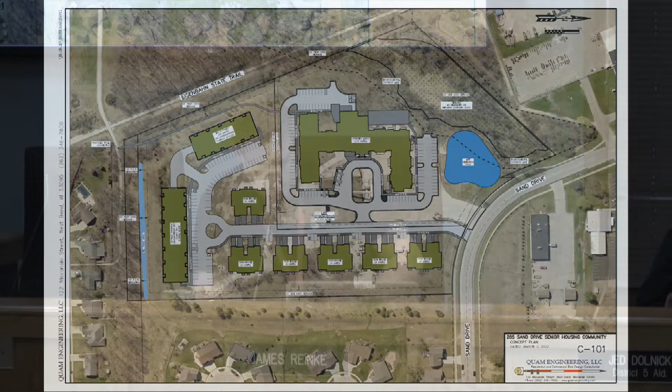Given the size and the limits of access for the site, it is recommended that trash corrals for the storage of refuse and recycling be required for the large multifamily buildings. City refuse pickup would not be available for those buildings given their size and the type of refuse service needed.

The developer is seeking endorsement of the revised concept to move forward with site plan configurations and approvals for both the institutional and the multifamily development.

Thanks so much, Jim. So as was stated, we're just looking for feedback at this time, so I'll open it up for the commission if anybody has any comments or questions.

Yes, sir. I assume there's space available for the additional 15 parking spots you said they're short on in the design? Yeah, they should be able to find an area for those, with a little bit of tweaking of the site.

How is the refuse handled if the city's not doing that? It would be through private collection, a private contract.

Yes, sir. I fielded a whole bunch of emails, and thanks to city staff, I think most of the questions were answered. Some of the questions were beyond my abilities, so I appreciate Mark and Jim's assistance.

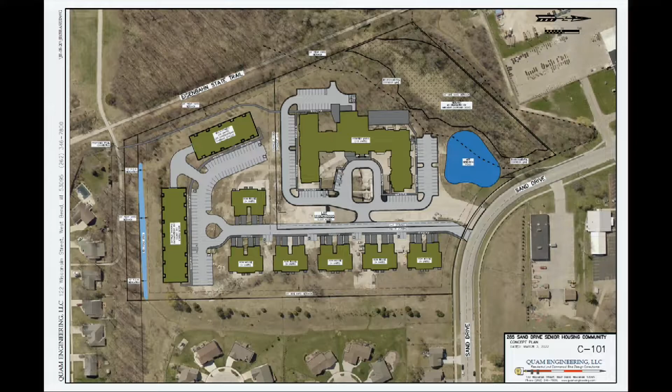But just to say, this being a concept plan, there are some slight remaining concerns about the sight lines off the two cul-de-sacs, Webster and Richards. That will have to be nailed down at site plan time. At this stage with the concept, there are some best guesses, but with the site plan that comes later, when there's more to know about the excavating and so on, there'll be a much better picture of what those sight lines are going to be.

And then the other issue that has kept coming up, understandably so, is about traffic, and that would be part of the developer's agreement, am I correct? Is it at that stage that we require it, or at site plan, or what?

So we would require it at site plan. I had been contacted by the developer's team, by one of the consultants, to do the traffic impact analysis. But I told them to wait, because they were going to do a traffic impact analysis on a concept plan that we had reviewed last year, which we knew was not the final plan. So they would have to do it then, and then they would have to do it again with the final plan with all the changes.

So I told them to wait until we do have an actual site plan, which is going to be more the final configuration of the site, and then there would be the traffic analysis based on that, because we had unit numbers moving up and down, and we need those numbers set before we can do the final study. So I didn't want them to do the study twice, so I asked them to wait until they have a site plan developed, and then there could be a study relating to that site plan. So it is at the site plan time that we would get that.

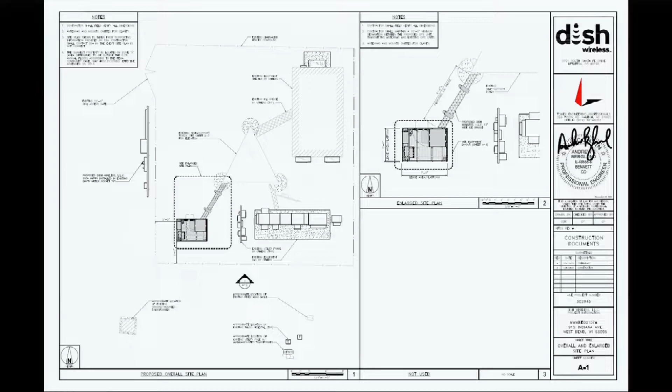Since this proposal is amending the original conditions of the conditional use permit, we recommend that some of the conditions listed be carried over from the original permit onto this one. All property owners within 200 feet were notified, and staff didn't receive any comments or concerns. So staff would recommend approval with the listed conditions.

Thank you, Jim. So this is a public hearing. I'll open that up. If anybody from the public would like to speak on this item, feel free to come on up.

Motion to close the public hearing. Second. All those in favor of ending the public hearing, say aye. Aye. Any opposed? Thank you.

We'll be looking for approval of the revised CU permit. Motion to approve. Second. Any comments or questions? Hearing none, all those in favor, say aye. Aye. Any opposed? Thank you.

Number 2, CU-22-003, public hearing for a conditional use permit to amend the existing conditional use permit CU-03-002 to allow for an additional communications user on the existing 150-foot cellular tower at 2230 South Main Street within the I-1 Institutional Public Service District by AELF Investments. The applicant is them, and the agent is Jeff Steinberg of Crown Castle.

AELF Investments has submitted a conditional use request, very similar to what we just approved. This is on a 150-foot tower at 2230 South Main Street. It's actually the same carrier requesting the conditional use amendment. Same type of equipment—they will be adding their antennas below the existing ones, so the height of the tower will not change. It's on a 5x7 pad, located within their 70 by 100 lease area.

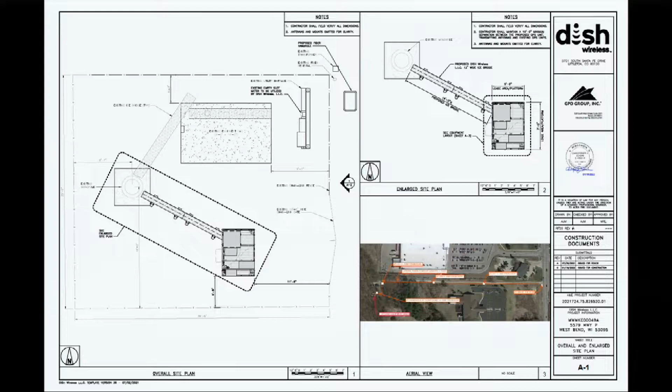We would carry over previous conditions of the other conditional use permit for this permit, and we've also notified everyone within 200 feet, and again we've had no comments or concerns.

Thank you, Jim. With that, I'll open up the public hearing. If anybody from the public would like to speak on this item, feel free to come on up. Oh yes, we do. I'm Jeff Steinberg, working with Crown Castle, so I'm just here if anyone has any questions. Sounds great, if you have any questions let me know.

Thanks for being here. I heard a motion from Commissioner Fleischman, second by Muddle. All in favor of ending the public hearing, say aye. Aye. Any opposed? Thank you.

We'll be looking for a motion to approve. Approval. Thank you, Model and Fleischman. All in favor, say aye. Aye. Any opposed? Thank you.

Moving on to site plans. Number 1, SP-22-003, site plan for exterior renovations for the east side of the building located at 105 through 111 North Main Street by Tracy Serwat of TRS 105 Main LLC. The applicant is him, and the agent is Solid State Architecture.

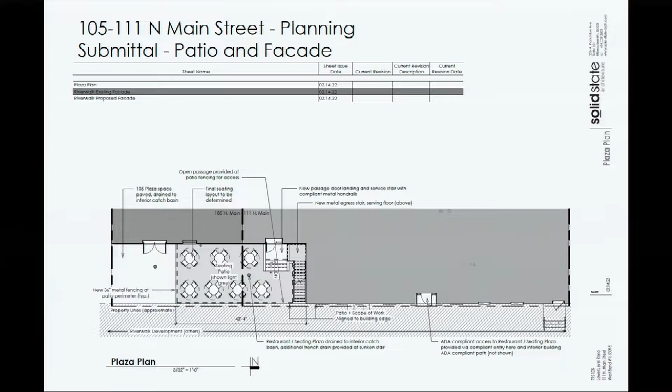TRS 105 Main Street has submitted exterior renovation plans and also a site plan for a patio addition, or reconstruction, to the east side of their building. The property is within the downtown area. The architectural changes include the existing brick being repaired and painted a cream city brick color.

Copper cladding will be used to accent the facade and infill areas. The windows and doors are planned to be changed out and upgraded. The patio itself is planned to be renovated and redone to complement the Riverwalk project.

As part of the changes, there are a couple of doors being changed that are within the floodplain elevation. Those doors would have to comply with our current flood standards, being either flood-proofed or certified as being flood-proofed.

There is a window on the far south end of the building that they were planning to enlarge. Unfortunately, due to the floodplain requirements, that window has to remain the same size, so as not to increase the flood area for the building. So there are some minor revisions that need to be done to that.

During review, staff had some questions regarding the grades and some drains being installed, so we need clarifications prior to issuing any permits—clarifications for the grade to maintain due to the flood elevations, and also for connections due to the Riverwalk being reconstructed.

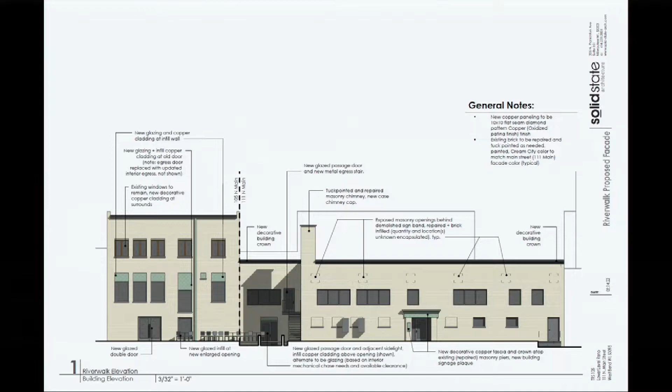So staff would recommend approval of the site plan with the listed conditions that we had for that. Thanks, Jim. I'll open up to the commission if anybody has any comments.

Yes, sir. I wanted to add that we will need some clarification for the stormwater. The new areas of the patio, we don't know what is there right now, so if they can show that on the plan. And then we need to know where those catch basins are going. So I would say that we would need to clarify the stormwater management conditions of the site prior to approving this.

Thank you. I will say, Max, that I did go through past photos of the site because I had the same questions. Right now it's not a good judgment of existing condition because of the utility relocations last year along the Riverwalk. But to judge accurately what we're changing it from, it's predominantly impervious - it was either hard packed gravel or concrete back there. So there's not going to be a lot of change relative to this, but we'll get that confirmation for you.

I did just want to say bravo to these folks for stepping up and doing this to the back facade of their building. I just think that's fantastic. One of my concerns when we got onto the west side of the river was that we were going to have a bunch of back buildings that weren't necessarily going to do anything about it.

Yes, thank you. So this is the redevelopment for the former Shopko site. The proposal is to subdivide that building into 3 units, and then also build an addition to the south for a 4th additional unit. So the tenant units range from 35,000 square feet to 8,900 square feet.

The property is zoned B1 Community District, Business District, and the retail alterations are being done in accordance with the zoning district. Access to the site will remain the same.

What they're proposing to do is to seal coat the parking lot and restripe it. They're also adding a loading dock on the west side of the building to accommodate loading and unloading for one of the tenant units. And again, the 8,900 square foot building addition will occur on the south end of the development, and that area will just be slightly modified to accommodate the grades, the sidewalk, and the building portion for that. The site lighting will be upgraded

from what exists today. The landscaping areas will be cleaned up, and any dead and damaged plantings will be replaced within those areas. The screen refuse area does exist on the south side of the building. Stormwater management is needed - an amendment is needed for the development and is currently under review by the engineering department. And again, the grades will be slightly modified just to accommodate the new building addition area.

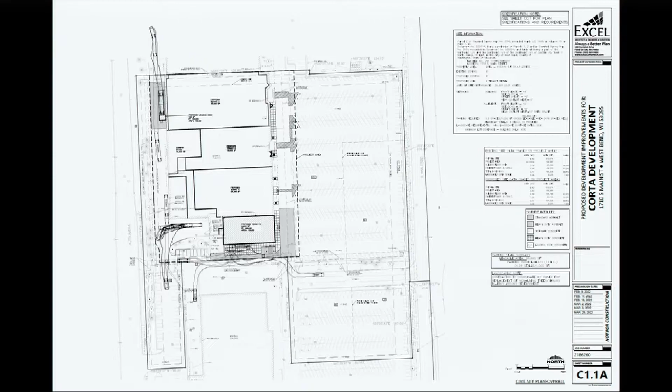The architectural building elevations have been included. The building itself will be repainted, and each of the tenant areas will have their entrances modified for their uses and to dress up the face of the building. The wall signage is depicted on the building. Individual permits will be required for those in compliance with the codes. Depending on the size, these will be determined based on how they appear and how they fit in, to be appropriately sized for each tenant unit.

Staff would recommend approval of the site plan with the listed conditions. I'll open up to the commission if anybody has any comments or questions.

Yes, Max, I do have a couple of questions. About that loading area, the bollards are around the curb—do they need to go all the way to that man door at the end of the sidewalk? That was a loading area for that tenant unit. After our review, they were originally showing a perpendicular unloading, but unfortunately, due to the distances we have there, we won't be able to do perpendicular. They'll have to do a parallel unloading area to meet our code.

I know this company's doing all of this, but are they getting separate site plans for the facades? No, it's a unified facade. What you're seeing is what's going to be constructed. They're just modifying these to meet their needs, but it will be done by them. I see, okay, good, thank you.

Motion to approve. Second, thank you, Model and Schmidt. If there's no further comments or questions, then all those in favor of approving the site plan with conditions, signify by saying aye. Aye. Any opposed?

Thank you, and then we're going to move on to zoning amendments, certified survey map, and site plan. Items 1, 2, and 3 are all about the same topic, so I'm going to read all these off, and then we'll let Jim take it from there.

The first one is number 1, ZPU-22-003, a public hearing for a zoning amendment for commercial redevelopment at 815 West Paradise Drive to add a PUD, planned unit development overlay district, over the existing B1 community business district to allow for the approval of a site plan for design flexibility and for shared site amenities by PMM Development LLC. The applicant is Ram Subedi of PMM. The agent is Adam Stein of Logic Design Architecture.

And number 2, CSM-22-004, a certified survey map to create 2 lots located at the southeast corner of Parkway Drive and West Paradise Drive by Ram Subedi of PMM Development. The applicant is him, and the agent is Don Chaput of Chaput Land Surveys. And finally, number 3, SP-22-005, a site plan for commercial redevelopment at 815 West Paradise Drive by PMM Development LLC. The applicant is Ram Subedi of PMM. The agent is Adam Stein of Logic Design Architecture.

So the first part is the planned unit development, which is being requested to be placed over the 1.8 acres. This will help facilitate the redevelopment of the property, with shared parking, private utilities, shared stormwater management, and drive access between these 2 lots that will be created, and also the lot to the east where Associated Bank is. Staff would recommend approval of that zoning amendment with the listed conditions. And again, as part of this, it's a public hearing.

We've notified everyone within 200 feet. Staff has not received any comments or concerns in regards to the zoning amendment.

The next component would be this certified survey map, which creates the 2 parcels. The western parcel, located along Parkway Drive, is 0.8 acres, and the eastern parcel is 0.95 acres. These 2 lots are being created to have the 2 different restaurant users as proposed in the site plan.

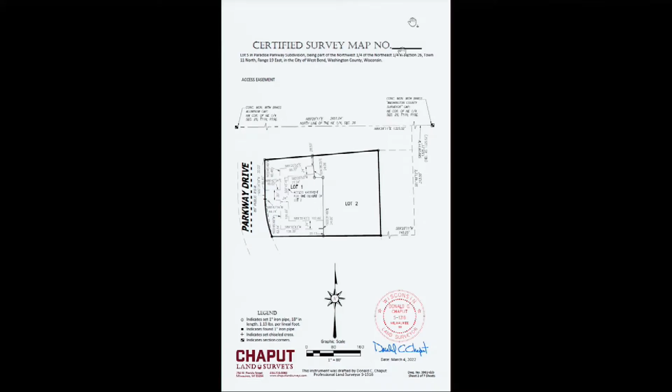So the site plan itself is for a Chipotle, which is going to be on the west side of the development, on that 0.8 acre site, and then the eastern one on the 0.95 acre site is going to be a Panera Bread user.

Both development proposals conform to the zoning requirements, and the need for the PUD, again, is for the shared parking, shared stormwater management, the private utilities that run through both the properties to serve these buildings, and then also the access for this.

The development will have one access onto Parkway Drive. That access has been shifted from where it is today all the way to the south to maximize the traffic flow for the traffic signals. There is also cross connection to the property to the east, and that property has access to Paradise Drive. So these two properties will have access to that via easements that exist out there.

The site plan has been designed for truck turning to be done on site. They are using a smaller semi-truck, not the typical 53-foot semi, so we would have some restrictions for truck turning on that. This would be part of the developer's agreement in regards to site access for truck deliveries.

The architectural building elevations for both developments do include signage. The wall signage will need separate permits and will need to conform to the sign requirements. The site plan also identifies 2 ground signs, one for each of the developments on their sites.

For the 2 buildings, the Chipotle building will be a dark gray colored brick veneer along with a light gray EIFS, and will also have metal canopies over the main entrance area. The Panera building will be a beige colored brick veneer with a green colored EIFS on the upper portion, also using metal canopies, and then accenting with an aluminum metal panel on the upper portion of the building.

Staff would recommend approval of the site plan with the listed conditions. Thank you, Jim, for that very detailed presentation.

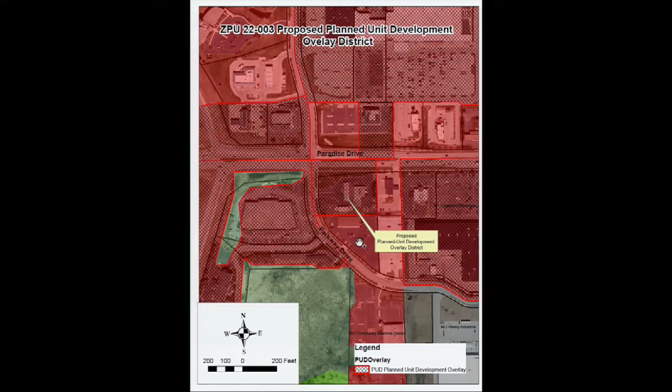Earlier we talked about Menards doing an extension into the park and ride area. It sounds like these are getting close - I can't quite picture this visually. Isn't this backing up to that Menards project a little bit, or am I way off? By the corner, if you look at the one plan, this is where the Shell station is, and Menards is right next to it. The tire shop separates those two developments.

Okay, alright. I guess since he opened it up now - I take it the car wash is getting knocked down too, is that correct?

Yes, everything on that site is being demolished, correct. And there is going to be a drive-through for each building, is that also correct? Correct. So the Chipotle has a pickup window, and the plans did show that - yep, they have four stacking stalls for that. The Panera has a dual lane ordering, and both of those lanes have four stacking before they merge in for pickup. Okay.

All right, well we do have a motion and second on the CSM. So all those in favor, signify by saying aye. Aye. Any opposed? Thank you.

And then we'll open it up to the site plan, which I think is what everybody's questions are about. I'll start this off too, because I had a couple questions. When I looked at the property itself, I questioned how they were going to fit both of these buildings on what seemed like a small lot. So I appreciate seeing the site plan now and getting a better understanding of that.

You brought up how the lanes, Jim, were smaller maybe than average, if that's what you're trying to get at. And I guess, are you concerned at all with traffic flow? It just seems like a lot of cars and a lot happening in a small property, I guess. That's a nice way of putting it. Yeah.

Initially we had less stacking and it originally didn't meet the code. But they actually moved the menu boards forward to get the minimum requirements of four per lane. They will have some stacking in their own private driveway. But yeah, there may or may not be a peak time that could block some flow on their own site.

So I just wanted to raise the flag to verify the diameter of that pipe compared to what you need. And then the plantings along Parkway, we had concerns with the little space between the pond and the right-of-way, everything squeezed tight there. We're concerned with things ending up in the pond with leaves, etc. We wanted those items out of the pond, but then not in the right-of-way, especially the trees, concerned about the roots popping the sidewalk. So I don't know if that's an option to remove the trees and just leave the shrubs. I'm just asking the question at this time.

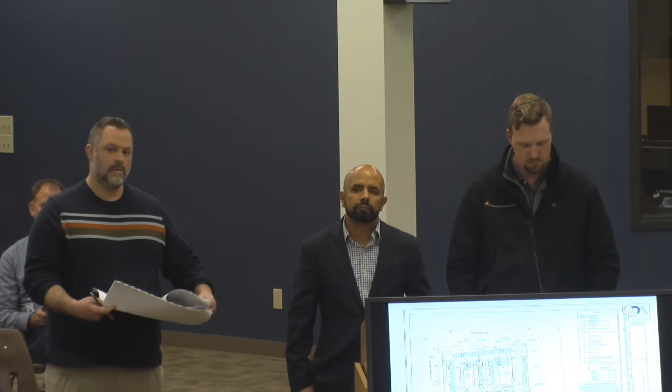And then finally, the last item, but that's more a question for Jim, regarding the sign that's right behind the vision triangle. I saw on the plan that it was proposed at 4.5 feet behind the right-of-way line, and we're saying we should move it back in order to meet the 5-foot setback. But if we do that, then it ends up within the pond, I'm going to call it zone of influence, basically where the water is going to go in the pond. So my question is, would there be a way for Plan Commission to grant an exception to leave the sign where they are proposing it, 0.5 foot closer to the right-of-way, so that it would not impede the stormwater management on the site?

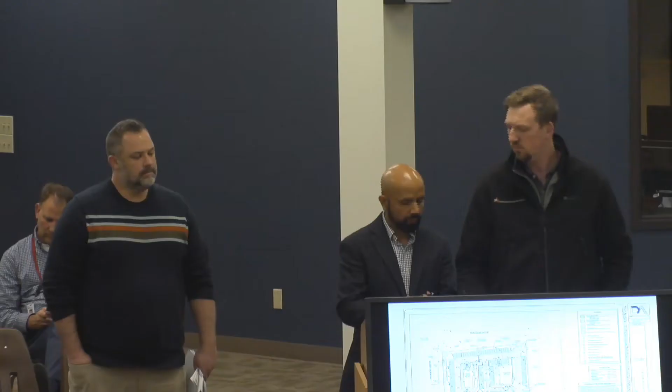Yeah, that would have to be part of the PUD, but we did advertise for the flexibility of it. It could be a possibility, but again, that's the call of the Plan Commission. I noticed that when we did my final review, that's why there was a comment about the 5-foot minimum. And again, we didn't have any requests for that change, so I was keeping it at the 5-foot minimum. But if there is reason for it, or if the commission finds it acceptable, we try to hold everything to the same standards for all the developments with the 5-foot minimum.

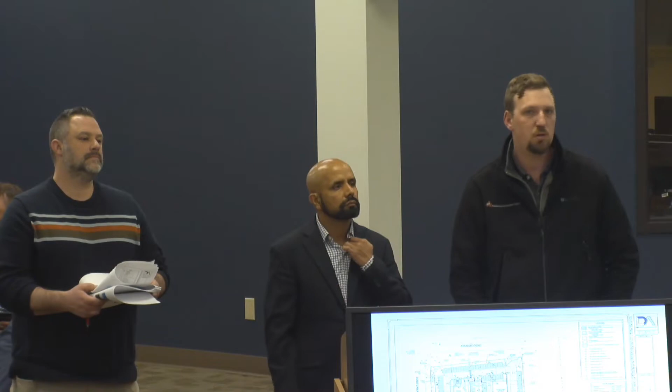I don't know if I can just speak to that monument or pylon sign question. Would it be an option to go from monument sign to a pylon sign on that corner to alleviate some of the foundation and size issues? Again, that's a request to the Plan Commission. We don't have any design plans for it, I have nothing proposed to the commission. But typically we've done just the monument-type sign bases. Okay, because that's the typical community standard that we have. No, that's fine, I was just asking overall intent and what you guys have seen in the community.

I think one of the things I wanted to point out about the monument sign, and I fully support what Max said, the vision corner setback is from, I believe the zoning code reads, from property line. It's set back a certain distance to the east and a certain distance to the south, in this case a 35-foot vision triangle from the right-of-way lines. But it's important to note that the right-of-way lines are significantly off the actual street here in this corner. There's a large distance from the actual roadway to the right-of-way or property line. So by pushing that monument sign a couple feet closer to the corner, you still have way more than 35, it's more like 70 feet, if you look at car to car, the actual view. So I think you have a lot of room.

Something for consideration. Max, if I can ask you a question, the proximity to the other storm sewer facilities that are in that right-of-way, is reducing that setback only a half a foot going to be any issue for your doing repairs and modifications in the future in that right-of-way area? I know we're not going to be looking for more right-of-way width for the road, but we have infrastructure within that grass area.

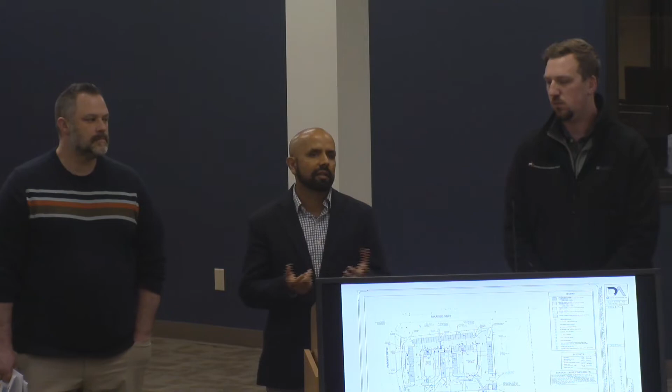Just for the record, that transformer is being moved to a different location, so that screening, if that was probably for the transformer, may not be needed anymore. We appreciate it. We figured your first snow plowing event would remove it anyway, so.

All right, any other comments or questions on the site plan? Would a motion to approve as the site plan sits handle the half-foot variance? We don't need to alter it, we know that you're allowing that. It'll be noted as detail in the minutes.

We would still ask for the conditions that we included in general, because there's a lot of implementation issues we still have to take care of. Motion to approve including conditions. Second, thank you. If there's no further questions, all those in favor of the site plan, signify by saying aye. Any opposed? Thank you.

Thanks, guys, thanks for coming out. Thanks for investing in the city. I just wanted to say, my name is Ram, and Jim, Max, you guys are great. The plan commission should take pride in them, they are so informative, so prompt, so helpful. That's awesome to see. Thank you. Awesome, that's what I want to hear. So proud of you guys. Good job, guys. All right.

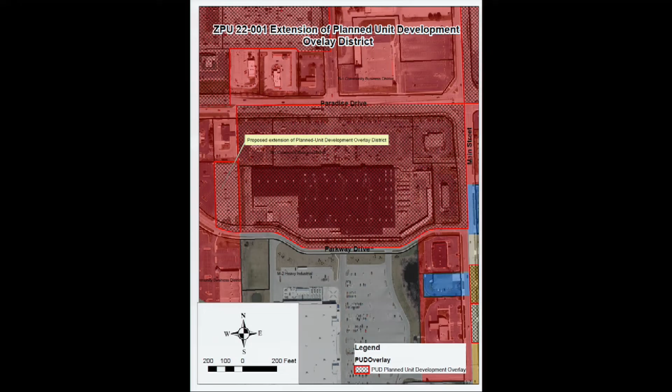The actual building expansion for Menards includes a 12,500 square foot indoor storage area, a natural extension of the existing building. The yard will also be extended to the west, and that will house outdoor storage similar to what's existing today. This is all to help facilitate this, and also changes the TID number 6 boundary that we have for that development.

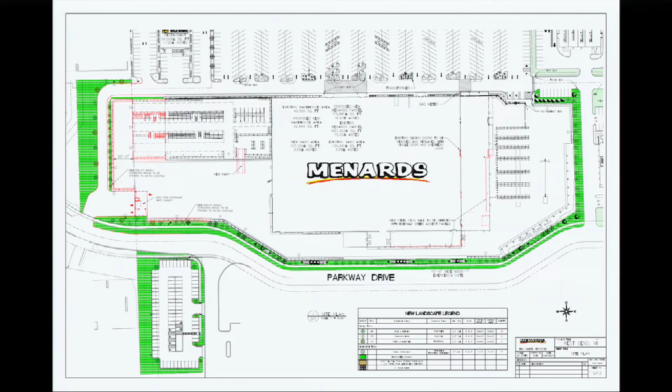Access to the site will continue to be from Parkway Drive. The existing driveway will actually move to the west. Some of the utilities within the site, there's a 10-inch water main that exists there, which will be relocated to the west into that new driveway area west of the building addition. Stormwater management amendment has been submitted and is under review. The grades have been designed to drain to the west via various storm sewer systems, which then discharges to the south. Site lighting is identified on the plan.

They're going to modify the lighting as needed for the driveway being proposed, and also along the storage areas. The architectural building elevations include the extension of the building to be the same brick along the north face, and then along the west and south sides, the fencing that exists out there today will be extended to define that outdoor storage area.

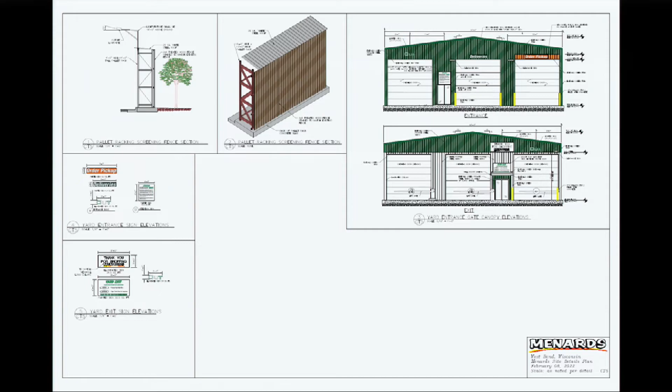Staff would recommend approval of the site plan with the listed conditions.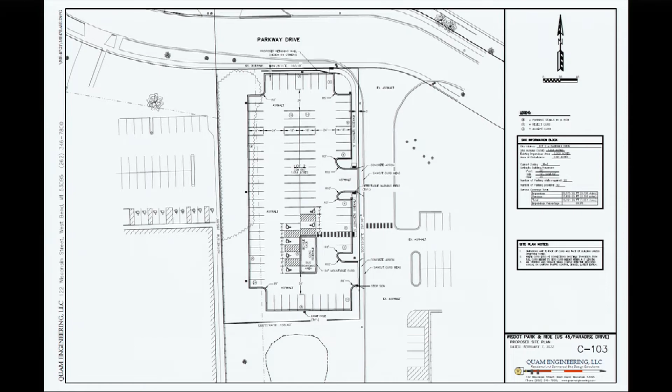Stormwater management has been designed to drain to the northwest corner. That will then be conveyed to the south to the existing stormwater pond south of the parking lot. A stormwater management plan amendment has been submitted and is also being reviewed by the engineering department. Landscaping is being provided, with minimal landscaping, essentially trees planted in the landscape island areas.

Site lighting is also proposed along the perimeter of the parking lot. As part of the review, engineering is requesting traffic generation calculations to make sure the traffic volume complies with the traffic impact analysis approved for the Meijer development. Again, staff would recommend approval of this site plan with the listed conditions.

Sounds great. So we'll start off with the zoning amendment. This is a public hearing for the Menards project. If anybody from the public would like to speak on this item, feel free to come on up and let us know what's on your mind.

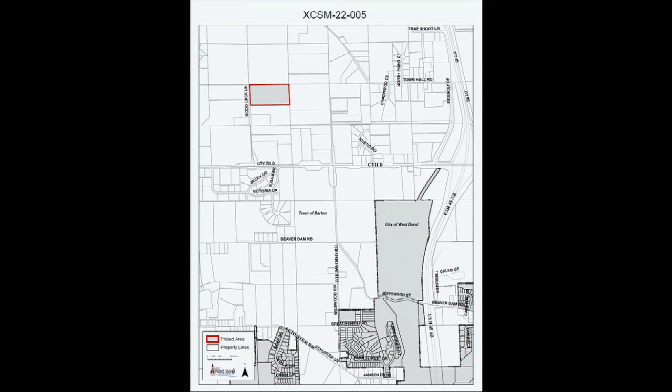This area is not within the city's sewer service area, but is in the planning area and is identified as agricultural. Given the proximity of this use and the other residential uses to the south, staff wouldn't object to that residential use. Both lots would have access to Good Luck Lane. A 33-foot half right-of-way is being dedicated to the town for Good Luck Lane, and a 17-foot road reservation is being provided in accordance with our official map. The technical corrections I had noted have already been made. Staff just needs to verify everything has been corrected, but staff would recommend approval of that CSM.

Sounds great. Any questions for Jim? Motion to approve. Thank you, Model and Fleischman. All those in favor of approval, signify by saying aye. Aye. Any opposed? Thank you.

An hour and 20 minutes, not bad. Better than I thought. Having no further business for the Plan Commission, I adjourn by the call of the chair. Have a great night.